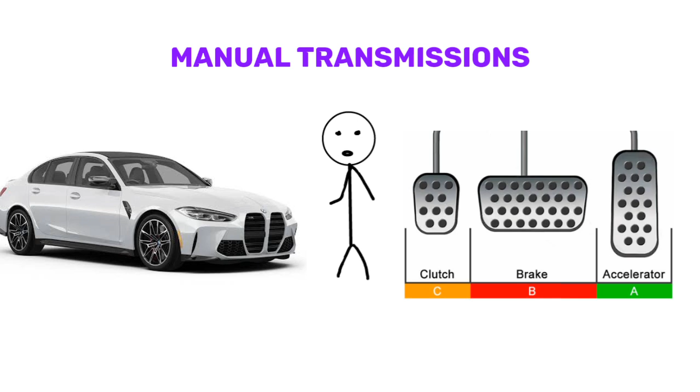First, let's know what a clutch is. A clutch is an essential mechanical device in cars, particularly those with manual transmissions. It serves to connect and disconnect the engine from the wheels, enabling the driver to change gears smoothly. In simpler terms, the clutch acts as a bridge between the engine and the wheels, facilitating seamless gear shifts without causing damage to the vehicle.

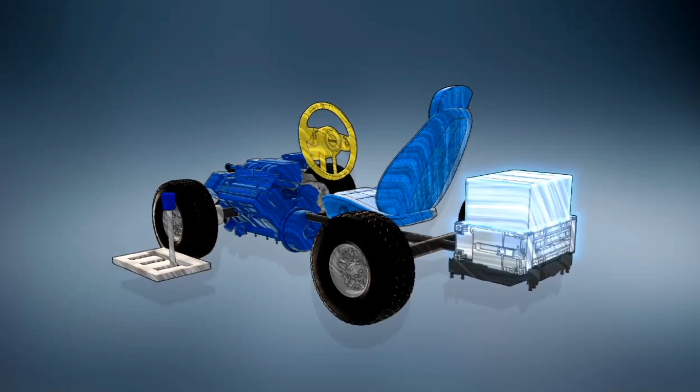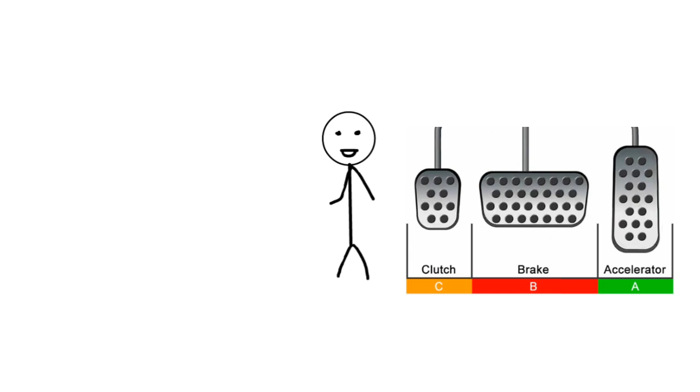Now, let's understand how a clutch works. But to understand that, it's important to understand its main components and their functions. The clutch pedal is the first component, positioned to the left of the brake pedal, which the driver presses with their foot. The clutch plate, or disc, is a friction plate that connects to the flywheel on one side and the transmission on the other.

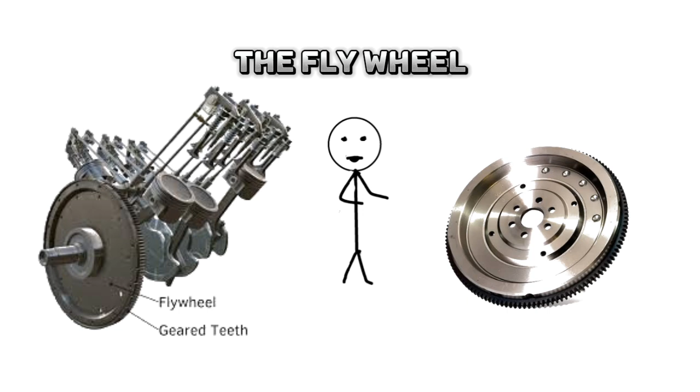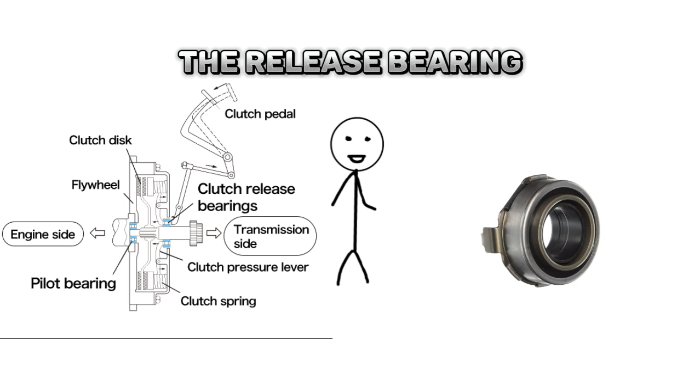The flywheel, a heavy disc attached to the engine's crankshaft, spins with the engine. The pressure plate applies pressure to the clutch plate, keeping it engaged with the flywheel. The release bearing, or throwout bearing, pushes against the pressure plate when the clutch pedal is pressed, releasing the clutch plate. Lastly, the transmission houses the gears that transfer power from the engine to the wheels.

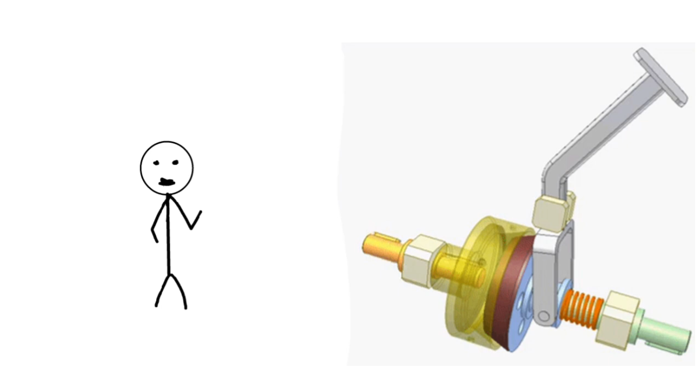Let's make it simpler and see what happens when you press the clutch pedal. The process begins when you press the clutch pedal, moving the release bearing. This action causes the release bearing to push the pressure plate away from the clutch plate, disengaging it from the flywheel. This disengagement interrupts the power flow from the engine to the transmission, allowing the engine to spin independently of the wheels. In other words, we press the clutch to disengage it from the engine so we can shift the gear meanwhile.

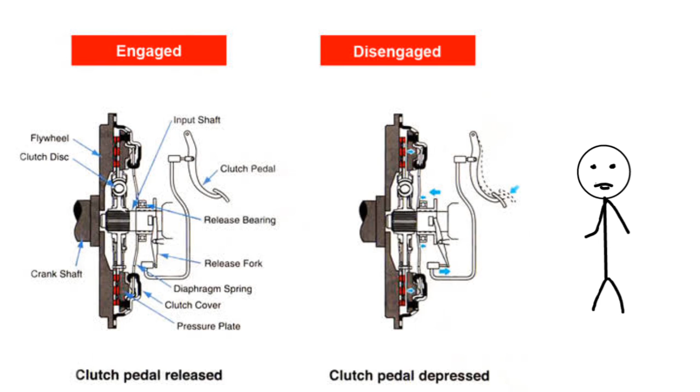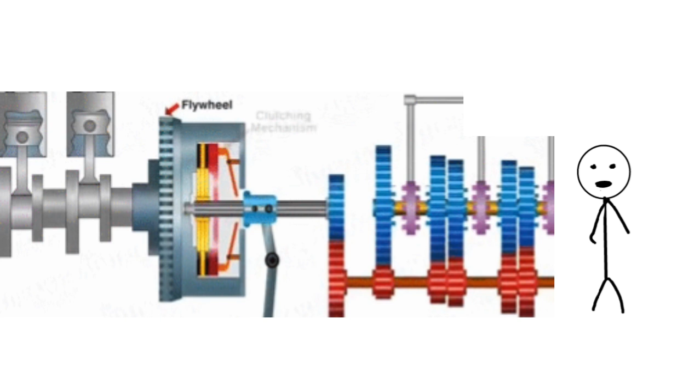With the clutch plate disengaged, you can change gears smoothly since the transmission isn't receiving power, preventing gear grinding. Once the desired gear is selected, releasing the clutch pedal pulls back the release bearing, allowing the pressure plate to press the clutch plate against the flywheel again. This reestablishes the connection between the engine and the transmission, enabling the car to move. But why do we have to press the clutch to shift gears?

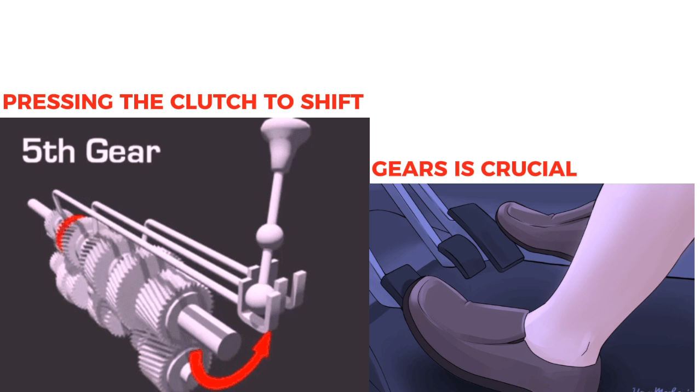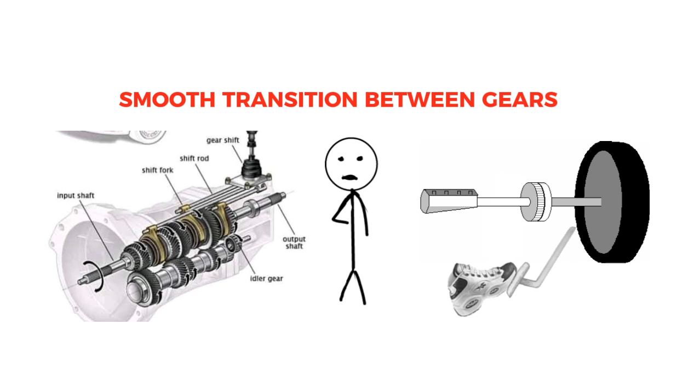Let's continue now. Pressing the clutch to shift gears is crucial for several reasons. Firstly, it prevents gear damage by avoiding the clash and grind that would occur if gears were changed without disengaging the clutch. Secondly, the clutch ensures a smooth transition between gears by temporarily disconnecting the engine from the transmission. Lastly, it provides the driver with control over the power delivery from the engine to the wheels, ensuring smooth changes in speed and direction. But how do automatic transmissions work without a clutch pedal?

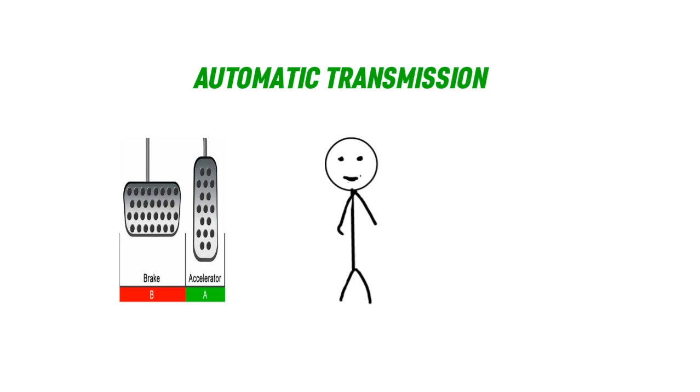Automatic cars don't have a clutch pedal like manual cars do. Instead, they use a special part called a torque converter. This converter connects the engine to the transmission using fluid. This lets the engine keep running smoothly, even when the car stops.

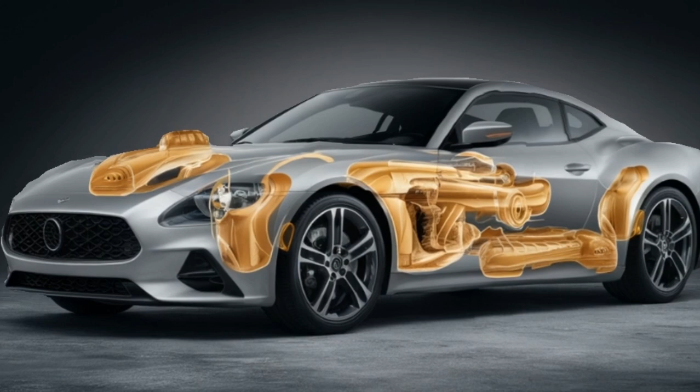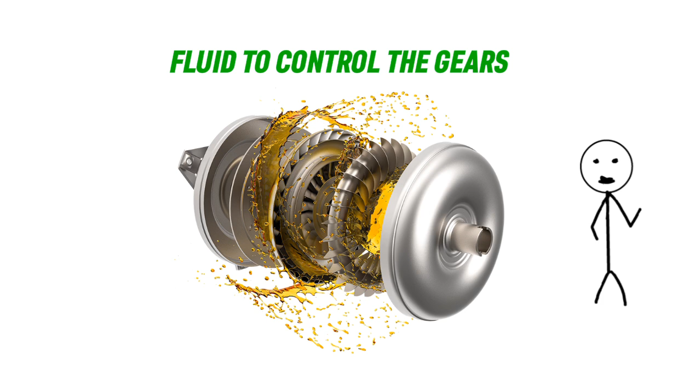Inside the automatic transmission, there are gears that automatically change depending on how fast you are driving and how hard you press the gas pedal. It's like having a special set of gears that know when to switch without you needing to do anything. There's also a system that uses fluid to help control these gears. This fluid pressure inside the transmission helps move different parts around to shift gears smoothly. It's all managed by a computer that tells the transmission what to do based on how you are driving.

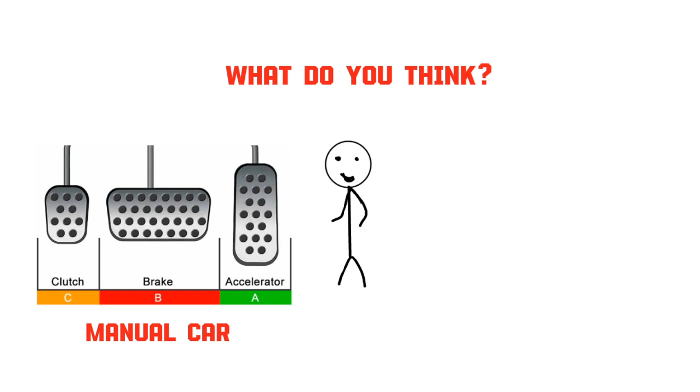What do you think? Does a clutch make the driving experience better, giving you more control, or is it better to just not have a clutch and get an automatic car?